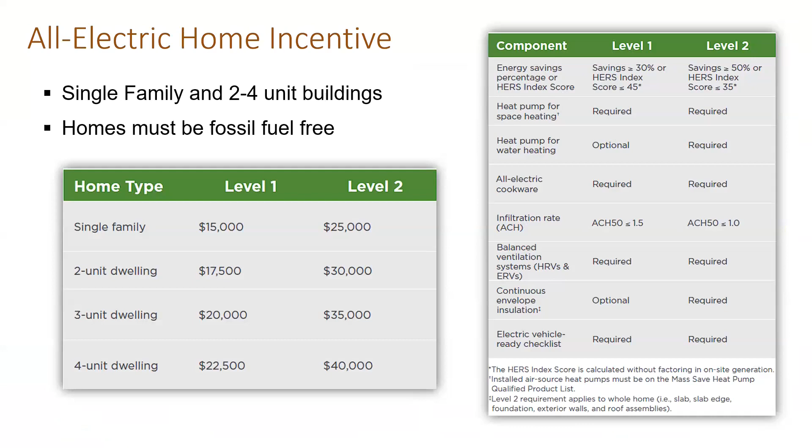So I want to thank Mass Save for rolling out these incentives and keeping them in place. Contact us or email about training opportunities through the Passive House program. We have a couple upcoming ones. At the end of this month, on the 26th, we're doing a case study on all-electric homes. Steve Demetric, who used to be a board member of Passive House Massachusetts and now does a lot of work in Rhode Island, will be presenting on cost-effective passive house projects at the residential, single family scale. Definitely tune in for that one. You can find all the registration details on our website, phmass.org, if you're wondering where to go for these events. Just go there, you can sign up, but this is going to be on Zoom.

I'd like to mention this every time, give us an update. One of the reasons I think we have a lot of new faces here is that Passive House is now part of the building code in the state. It's an alternative pathway into the stretch code, and it's a requirement for large multifamily buildings in the opt-in code.

Those are all the things I have to say tonight, so I'm going to go ahead and pass things off. David, coming up here. Thank you.

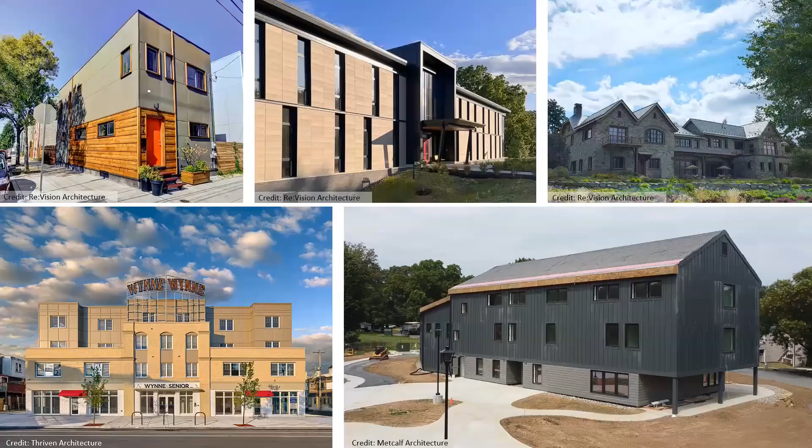So these are some of the projects we've done, both designed and consulted on. These three up top were designed by Re:Vision. The first one is a single family row house that was certified under PHI. The middle one is a building for Muhlenberg College, which consists of classrooms, offices, and art studios, and that one is going through the PHIUS certification process.

The one on the end is a very unique one for us—it was designed to look like it was 200 years old, and really designed to last at least 200 years, yet it still uses state-of-the-art prefabrication and panelization processes. All the doors and windows were installed in the factory and craned in on site. It has a real stone facade, so it's pretty unique.

It's also Passive House certified. The one on the lower left-hand corner was actually one of my first Passive House projects—a senior housing project. This one is under construction. These two were ones we consulted on, and this last one, still under construction, is a dormitory for the Solebury School in Solebury, Pennsylvania.

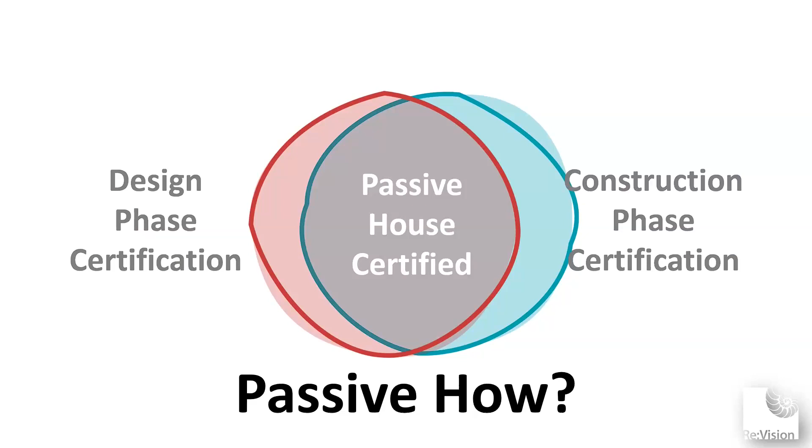So there are two phases of design to get to a certified project. There's a design phase certification and a construction phase certification, and those two combined are what gets you to a final certified project.

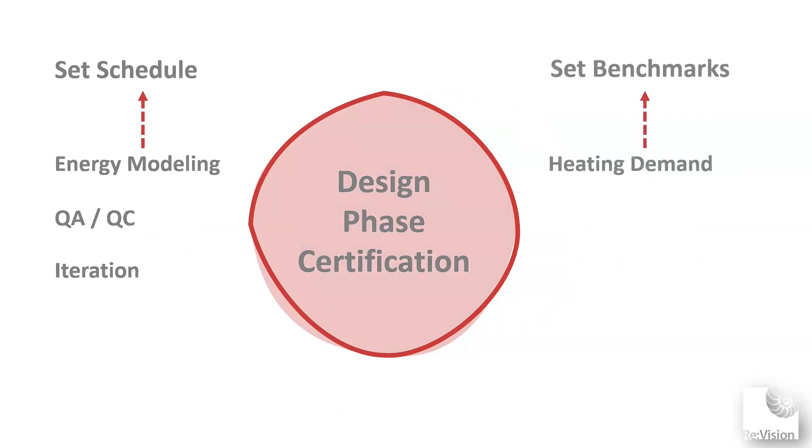As an overview of what we're going to talk about: during the design phase certification, we're going to talk about setting the schedule and the things that change when you're doing a passive house project versus a typical project. We're going to talk about how those passive house benchmarks affect the schedule, and then construction phase certification and the verification process.

Try to demystify that. I find that that's something that tends to surprise a lot of people, and that is a PHIUS-specific requirement. A lot of people are like, wait, we're doing passive house, why do we have to do Energy Star? What does that mean? So I want to take a little bit to demystify that.

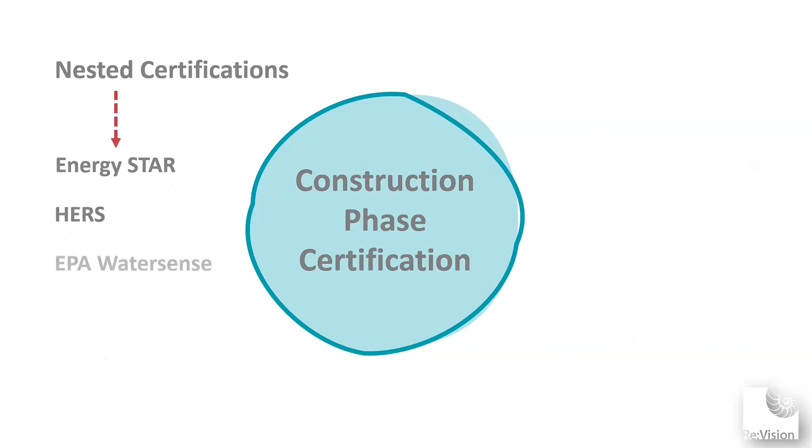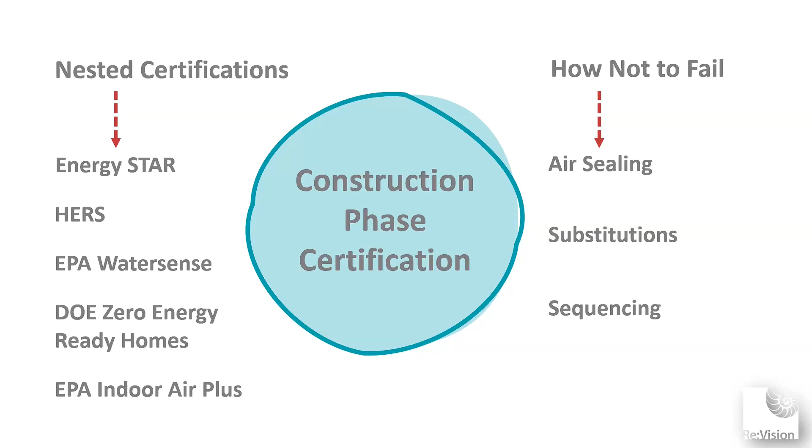We'll talk about some of the testing parameters as well, and as I said, we're going to talk about some of these nested certifications. And then I want to talk a little about how not to fail. You've done all this great design work, you've done all this coordination—I want to share a few lessons learned, some really common pitfalls and how to avoid them.

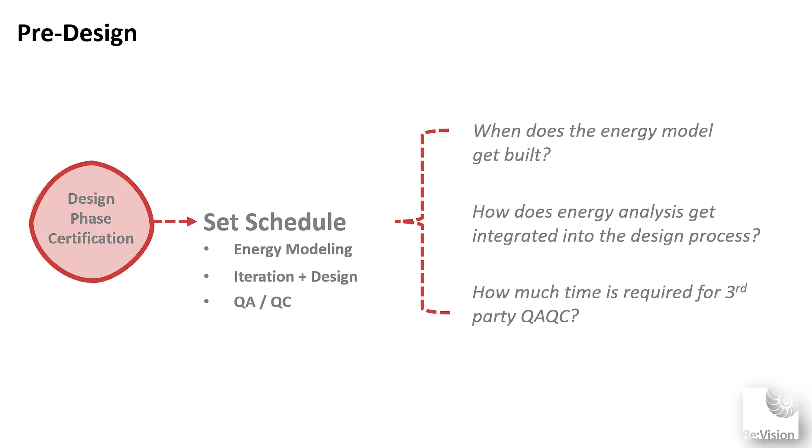So let's talk about pre-design. Really one of the most crucial things when you're scoping out a project is setting the schedule, and understanding how some of the extra things you have to do get folded into a typical design process. You have to ask: when does the energy model get built? How does the energy analysis get integrated into the design process? And how much time is required for third-party QA/QC?

What I want to show you right now is, I'm currently working on a 104-unit multifamily passive house in New York, and we just wrapped up schematic design. This is actually part of that schedule, so just to use this as an illustration.

So we had a couple of weeks where we had to do some redesign. We had to revise some units, coordinate the fenestration, have some time for internal reviews, then have the client approve those changes, and then distribute the backgrounds to our consultants. All this is very typical so far.

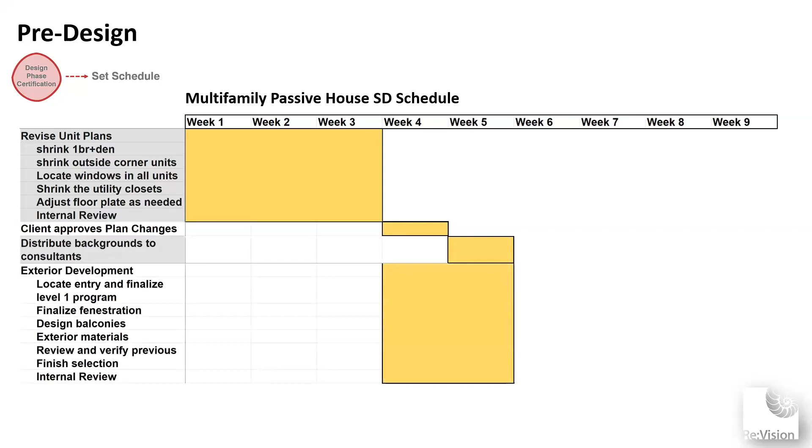And then we were going to get into the exterior development. We had some ground floor program that was commercial that we had to deal with, had to look at materials, etc. So there's that exterior development component still, and then we have about a week to get that facade scheme approved, and then move right into the building section, wall section, pricing notes, etc.

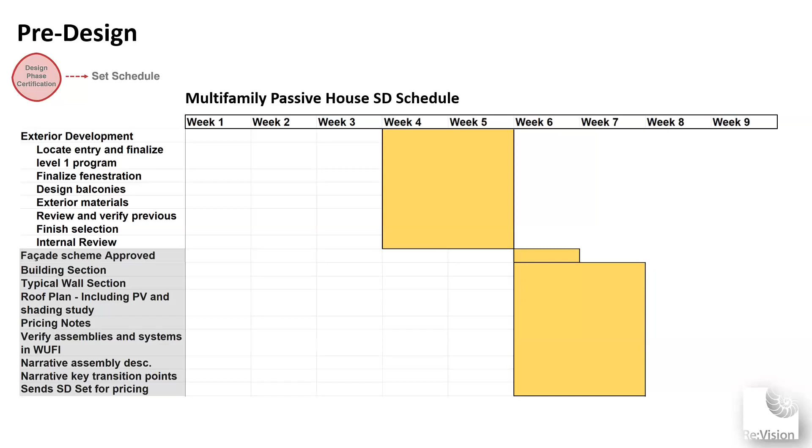And you'll notice down in that list, it also says verify assemblies and systems in WUFI. But as of yet, the schedule doesn't have any room for WUFI. Come on, there you go. And so here, we've got to pop in—oops, pressed it twice.

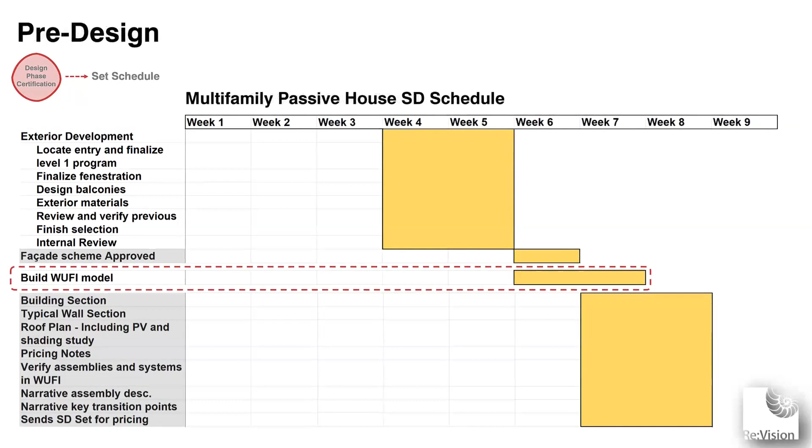So here we have the WUFI model, but you can see that the WUFI model is scheduled to happen concurrent with the building section and wall section. And the issue with that is that the design needs to inform the energy model, and then the energy model needs to inform the design. So when you're scoping out these projects, you need to make sure you're really building in time for these kind of feedback loops that you don't have in a typical project where you might just be designing to meet code at a minimum.

There are certain things that can happen concurrently. You can be cartooning out the set as you start to work on the WUFI model. You can be doing other things like the roof plan, etc., that aren't really going to be affected by the WUFI model. But you really need to make sure you have some space in order to get that feedback and integrate it into the drawings.

So we really recommend using WUFI or PHPP—it's the same thing. If I say WUFI and you use PHI, just think PHPP. They're both basically the same in this case, but we want to use both of those energy modelers as design tools, not just verification tools.

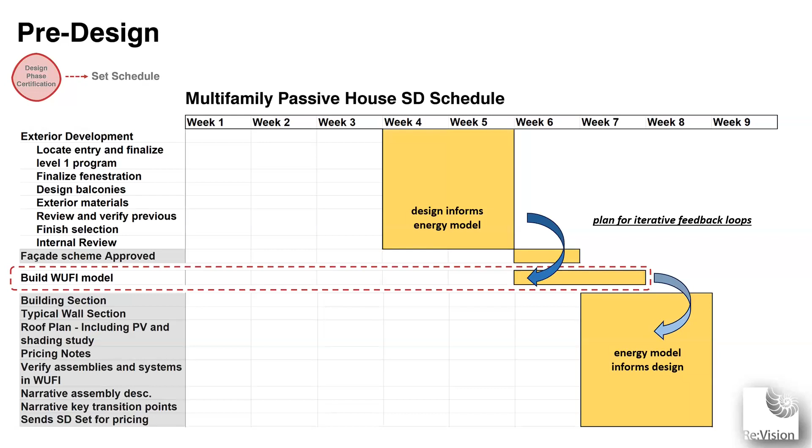And so the other really critical scheduling component is just how do you integrate the third-party QA/QC into the projects.

Their first round of review takes them 6 to 8 weeks. It's a really long time. You can do an expedited process with them. Like I said, I've worked with Passive House Academy—I can't remember what their timing was. I don't know what RDL's timing is.

And there's a bunch of, there's the certifier, so everybody's got their own timing. It's just really important to know that upfront and make sure it's going to fit into the overall project schedule, because something like this can really throw a wrench in it.

Especially when working on affordable housing projects, I've run into this a lot where we're waiting on confirmation and the developer can't actually close out the project and get the tax credits, or get certain parts of that released until they get the project pre-certified. It becomes this very intense and stressful time of push and pull as you're trying to get whatever certifying agency you're working with to give you final pre-certification or tell you what you're missing, so the rest of the team can do what they need to do and start construction.

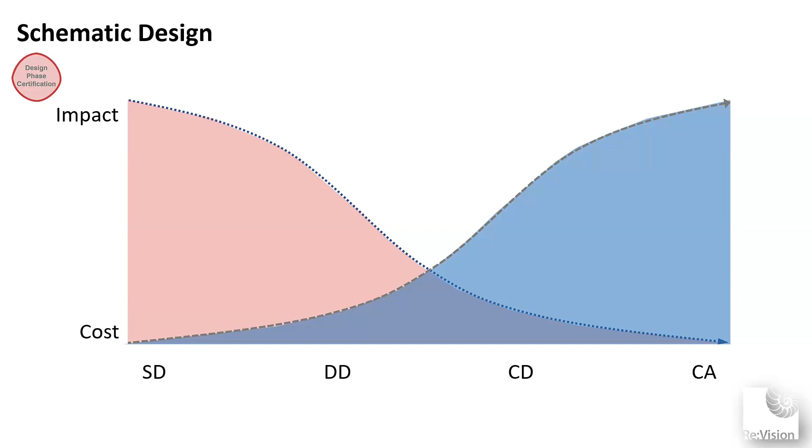And so that's why we really recommend changing the design process a little bit. In a typical design process, we start with broad decisions and we work and work until we get to more detailed decisions. One thing we find is that systems design tends to be one of the design decisions that kind of gets put off—not till the end of the project, but further down the line than it should be.

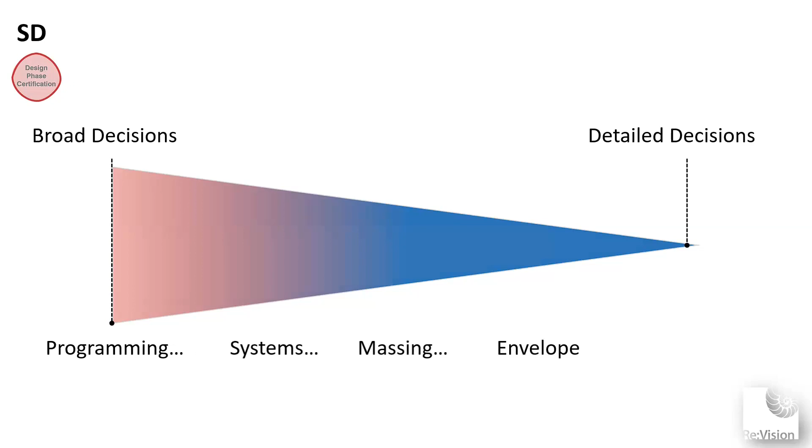So what we recommend is really moving systems much further up to the beginning of the project. Right off the bat, we want to be talking with the developers and the design teams about their preferences for how systems are designed. I'm going to give you a really quick illustration about why that's important.

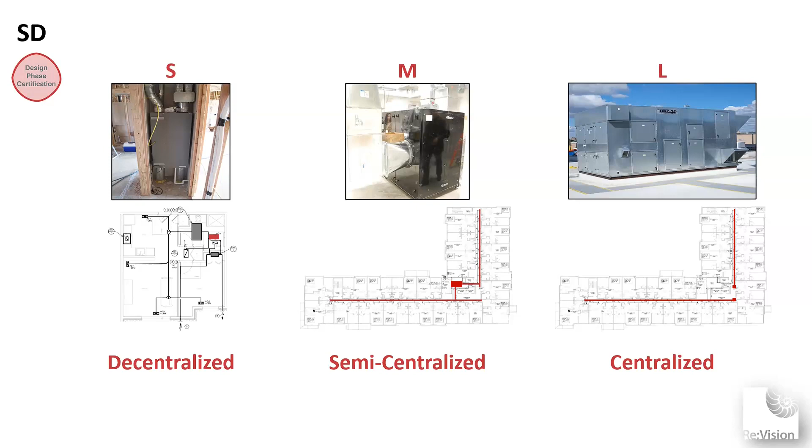Let's just talk about ventilation. As you all know, ventilation is crucial in a passive house project. You might do centralized, decentralized, or semi-centralized—I've done all three of these. I don't think there's any one right answer; it really depends on the developer's preferences mostly. That could be based on what kind of maintenance they want to do, or based on who's paying the utility bills and how things are metered. There's a lot of different reasons to choose any one of these.

But I want to focus on a decentralized system because that one definitely has the biggest effect. Decentralized systems have the advantage of being very simple, right—no trunk lines or fire dampers. There's definitely flexibility about where you can place them in the units. You might want to place them by the halls and access them from the hallway, or you might want an excuse to go into a tenant's apartment on a fairly regular basis to change the filters and make sure everything in the apartment's okay. Again, that's a developer preference.

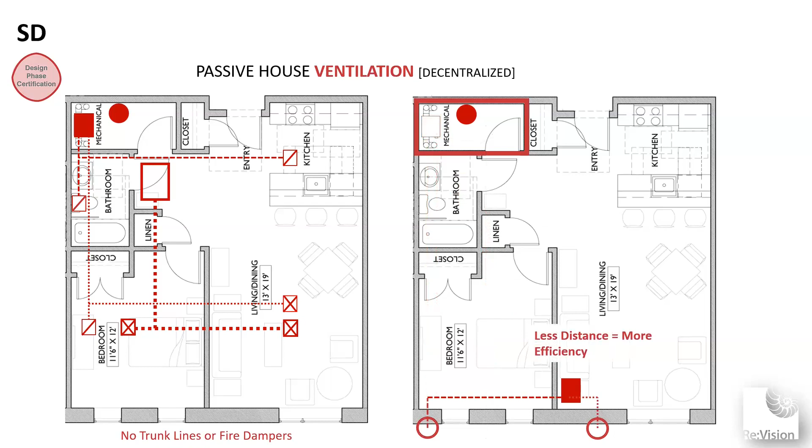And so what you start to see is that just based on the location of the ERV, you start to drive a lot of other things like fenestration. So the exhaust on a decentralized ERV like this needs to be 3 feet away from an operable window or door, and it's got to be 10 feet away from the supply. And so all of a sudden, what you typically don't see, which is the ventilation system, starts to affect what you do see, which is the fenestration.

And that fenestration, as we all know, really drives a lot of the character of buildings in general. It's a major feature. And so I can't tell you the times I've worked with a design team, and they've spent all this time making this beautiful fenestration pattern, only to tell them, yeah, that doesn't work.

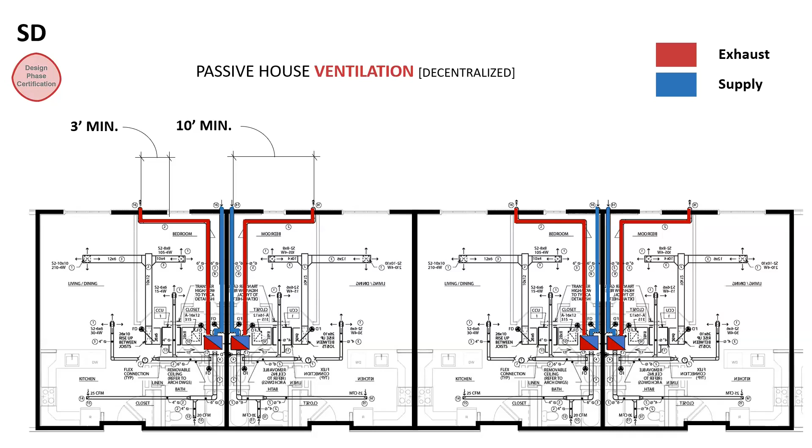So what we do is we recommend when we start working with design teams that they have this conversation up front. The sooner you have it, the less redesign teams are going to find themselves having to do. Less heartache, less pain, less suffering, much less expensive to make changes earlier on as well. You can really start to see how that's going to drive the character of the whole building, just from something as simple and unseen as a ventilation system.

So once we get into design development, that's where we really start to test the assemblies. As I said, we want to use these energy modeling tools, whether it's PHPP or WUFI, as a design tool and not just a verification tool. And one of the ways that we do that is that we'll test different versions.

We'll see what is the optimal amount of insulation for any particular assembly. And we can see here that there's very little difference in energy savings between 4 and 6 inches of insulation. However, 6 inches of insulation is going to be much more expensive to install than 4 inches. And perhaps we can find a way to make 3 inches work on a particular project as well.

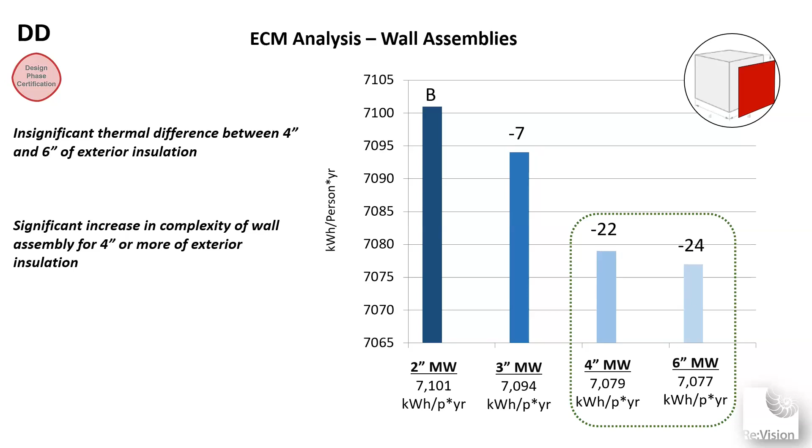By the way, the B on these were taken from an actual project. The B is for the baseline, so that's where we started, an initial assumption of 2 inches. Then we tested 3 inches, 4 inches, 6 inches.

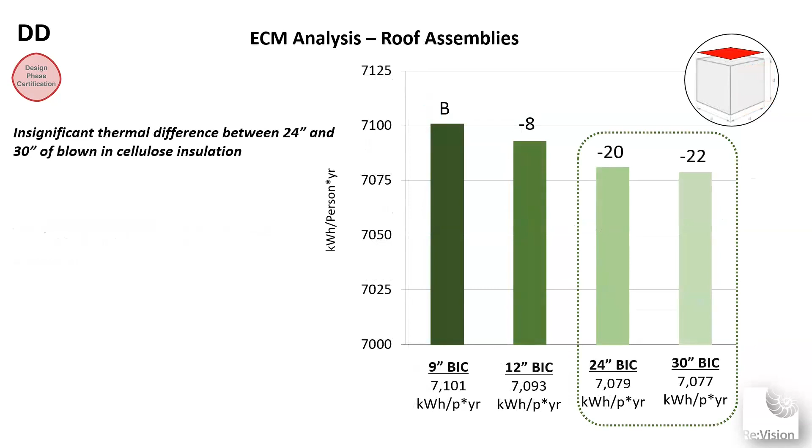We do the same thing with the roof. You can see here that there's very little difference between 24 and 30 inches. However, depending on what kind of roof it is, maybe what we do is we back off on the wall insulation. We go, okay, 4 inches of exterior insulation on the wall would be ideal. However, it's going to be really expensive.

We're going to need larger girts, a different kind of support system for the cladding. So let's try to get that back to 3 inches, and maybe we can add more insulation in the roof if it's just blown-in loose fill. And even though 30 inches doesn't save a lot more relative to 24, it might be enough to offset a loss elsewhere. So we use these as parametric design tools in order to optimize the assemblies and then optimize everything as a whole.

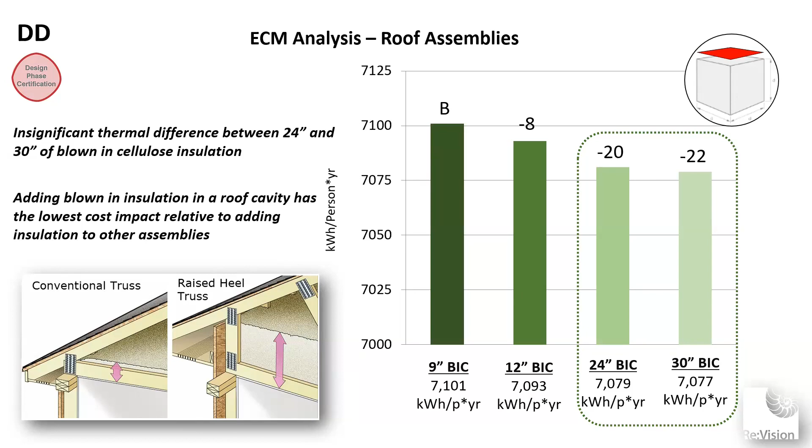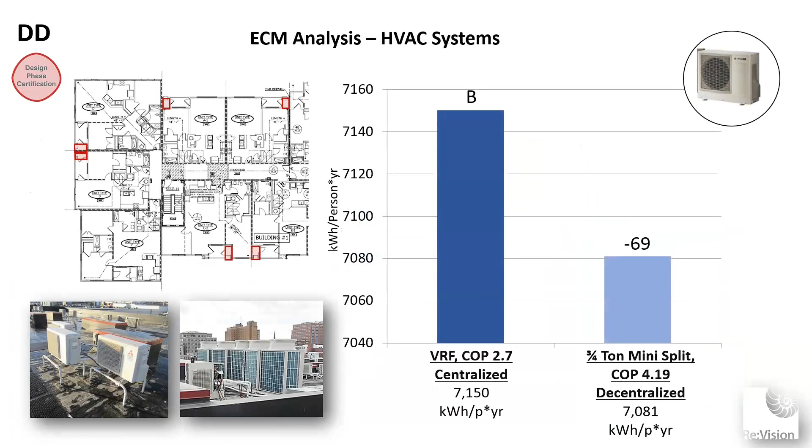We do the same thing with systems too. In this case, we were looking at centralized VRF versus decentralized mini splits. And again, there's going to be reasons other than energy that you might choose a centralized VRF over a decentralized mini split. I want to emphasize that there's no one right answer. What we're trying to get is to a balanced and optimized set of choices for the envelope and for the systems that work for the specific project.

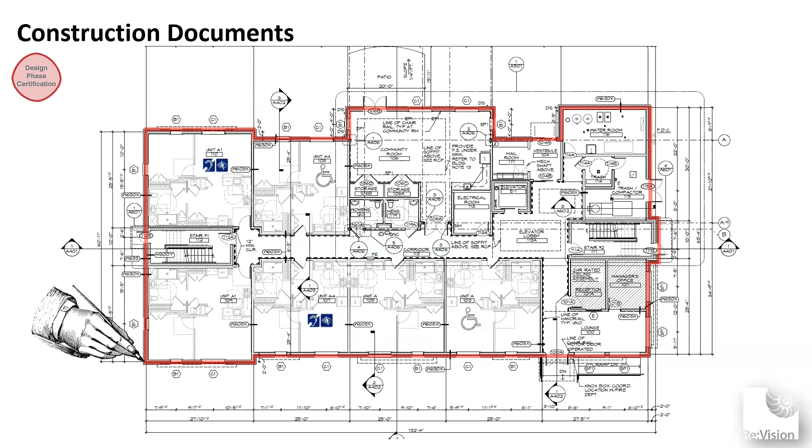When we get into construction documents, this is just an example of the red line test. It sounds pretty simple. We often will do this actually in the field with builders. We'll get into CA in a little bit. But although it's a simple test, it's a powerful test, and shows you where you start to have problem areas.

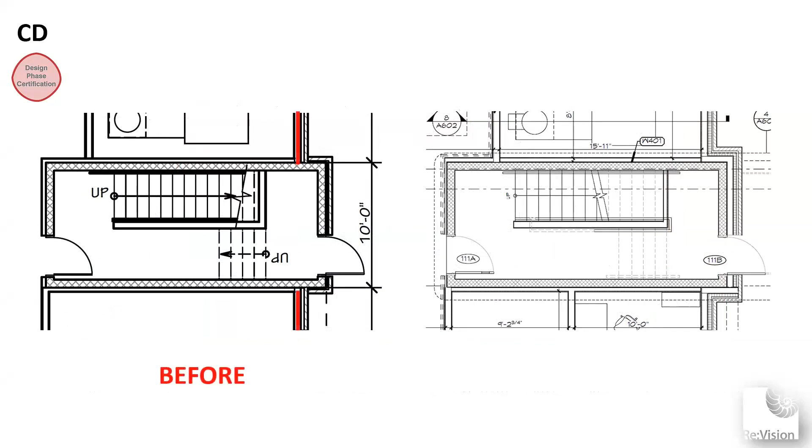So this is an example of some clients we're consulting for. They showed us these drawings. The CMU stair core was breaking through the thermal barrier. And so what we did is we just showed them how to wrap that thermal barrier around that CMU. In this case, it was a pretty easy problem to solve.

Others are more tricky. And one of the things that we find as consultants is that we can have conversations about sequencing. I know that sequencing is definitely a gray area for architects when they're talking to builders, because it gets into that kind of means and methods territory. But as consultants, we can talk about it.

And I was just talking to—tell me your name again? Zach. So Zach and I were talking earlier, and he was telling me about one of the things that they do on site is that they have these toolbox talks.

Every week they're game planning out the next two weeks of work, all the subs. And in a sense, we do a similar thing.

When we're going through the design process with teams, in order to think about things like constructability and sequencing, we do early design stage clash detection.

And make sure that those things are communicated in the drawings to the build team in the field. So in this case, we're looking at what does continuous thermal barrier actually mean.

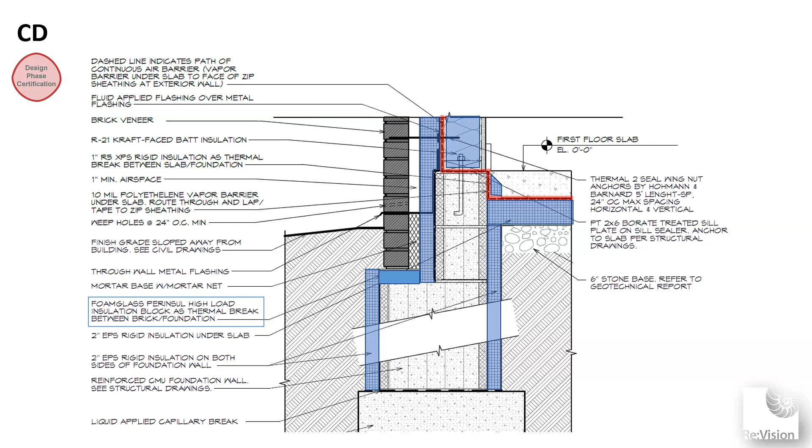So again, sequencing, responsibility of trades - that's the other key thing when we're talking through a lot of these details. It's actually more unusual for one trade to be responsible for the entirety of the air barrier. You often get one trade doing one part of the air barrier, another trade doing another part. So doing something like those toolbox talks and really making sure each trade understands their specific role is key. I'll show you in a little bit what happens when that best practice doesn't happen.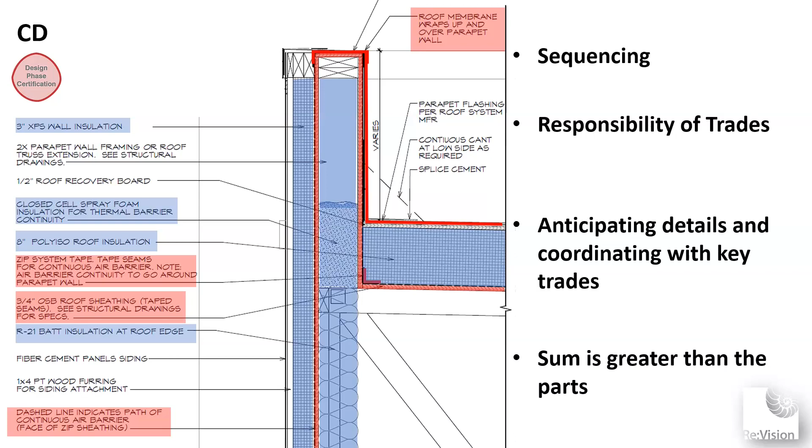Another thing we like to communicate to design teams is just leaving space for things we don't typically think about. I've seen this get projects into trouble too - this is just a waste line or vent stack.

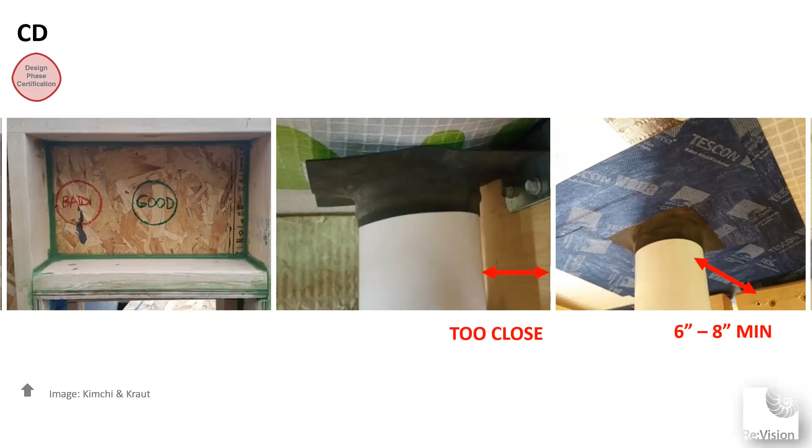If you don't leave it, we're used to just shoving them in a corner, not thinking about them - oh, the plumbing engineer will just stick it wherever. But you really need to leave enough room around it for the gasket and for the tape, because that is penetrating the air barrier, and that's going to be a major weak point if you don't prepare and plan for it.

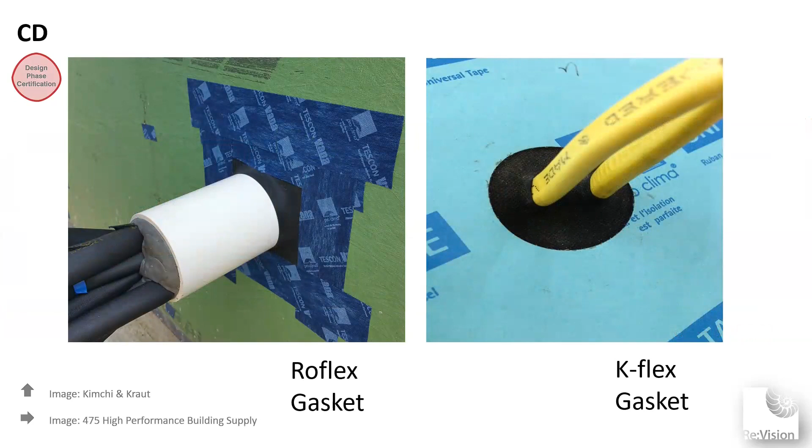This is just an image of a Roflex and a K-Flex gasket. The Roflex is for larger penetrations, ducts or larger pipes, and the K-Flex is for electrical, smaller electrical wires and whatnot.

So there's things like that where we want to go hardcore when it comes to passive house - like the air barrier, we typically go pretty hardcore, make sure all the gaskets are there, make sure there's room for everything. And then there's other places where we know how to back off.

Entry doors are always a troublesome part. You can get passive house quality entry doors that meet ADA and egress requirements, but they're really expensive and hard to get. So often what we do is we just go for a pretty good solution - we've used Kawneer 451s, we've used 1600 UTs, we've used a couple other brands as well.

Like a Kawneer storefront system, the entry system just kind of blends in with the rest of it. So you have to do a really good job weather stripping it. And you take a little bit of a hit on the thermal performance, but the buildings tend to have enough room with the metrics that we can handle something like that.

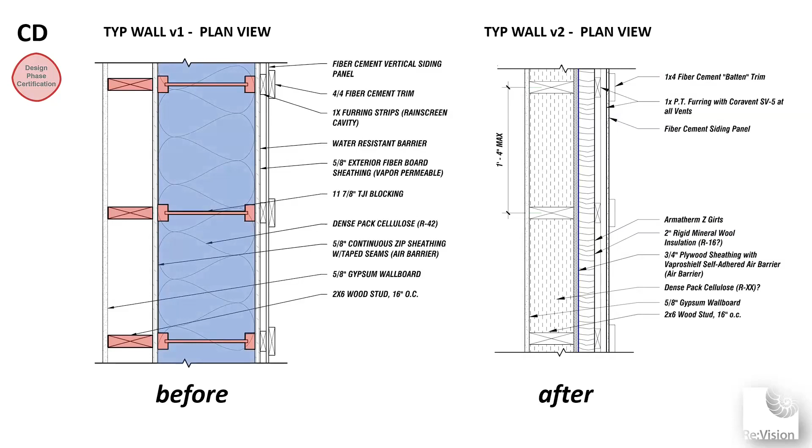However, once they brought us on, we built the energy model and said, hey, we can actually get this down to something much more standard - just a typical 2x6 wall, dense packed cellulose, 2 inches of exterior mineral wool insulation. It's really about knowing when to push and be hardcore about what it takes to achieve passive house, and knowing how to pull back and optimize to make something affordable and effective.

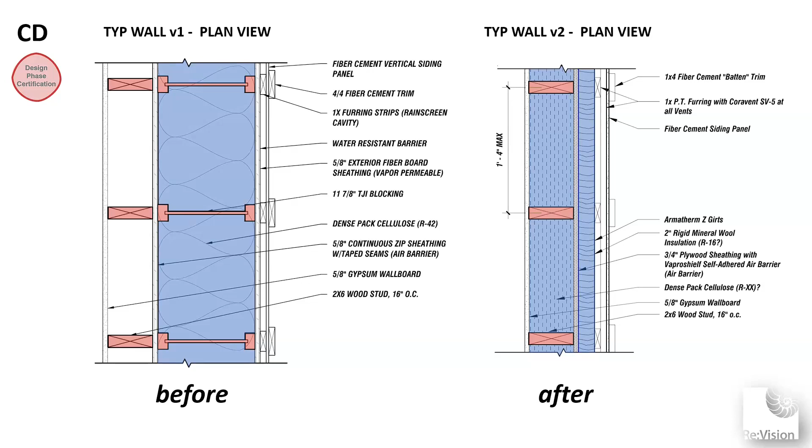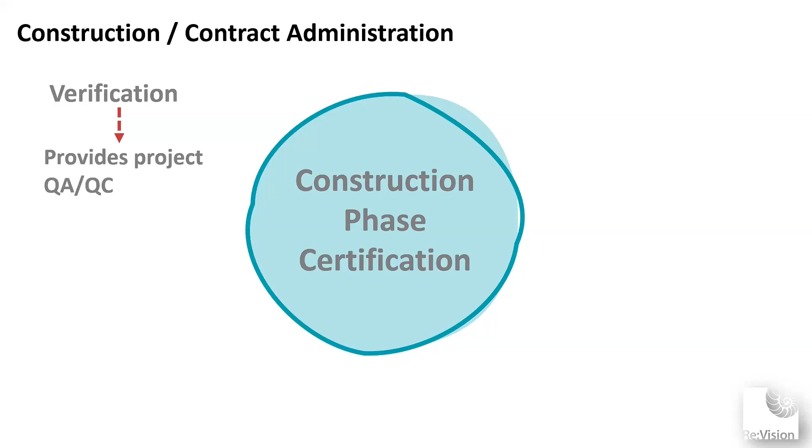So once you get into construction, we've got the verification process. Why do we do verification? Well, it provides project QA/QC, it validates the design decisions, it verifies the performance goals are met, and that it's going to function as intended. There's a certain aspect of commissioning to it, and it confirms that the building construction matches the drawing specs and energy models.

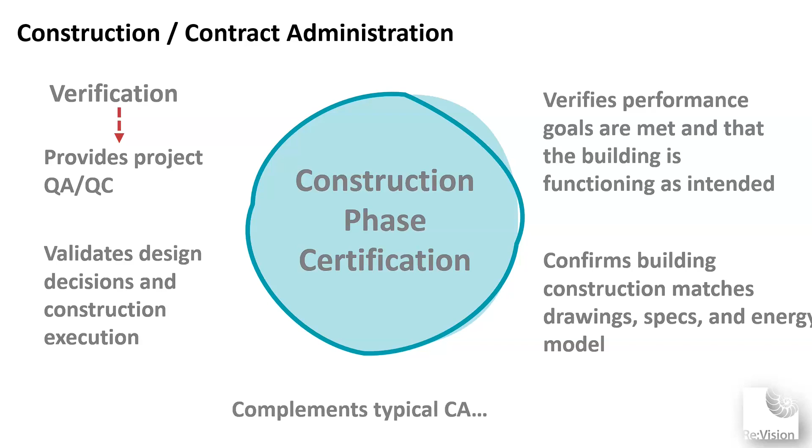I know that the developers here go through all this trouble and expense to get a project designed. You want to make sure you're getting what you paid for, and the verification process really helps with that. There's sometimes some overlap with typical CA, but it really is more in depth. I'd say it mostly complements typical CA.

In that verification process there's the assembly documentation, checklist completion - we'll talk a little about the nested certifications, and that's where the checklist comes in. There's some contractor certifications that always tends to take people by surprise a little bit. It's not a big lift, but if you're not anticipating it, it can be an issue. And then there's the testing regimens - envelope air tightness, duct tightness, and ventilation balancing.

So the verification timeline actually starts during design. This is specific to PHIUS - if you're working with a PHIUS rater or verifier, you want to bring them in early if you can, and have them review the design as an extra kind of QA/QC. They might have some insight regarding the testing and verification they're going to have to do later on, and can help the design team streamline that process.

And then there's the slab and foundation installation, where they're going to photo document that there's the right amount of insulation before you pour the slab. If you pour the slab and don't have any photo documentation of the insulation underneath, that's a problem - you gotta dig it up. You might find Jimmy Hoffa. You'll at least hopefully find enough insulation.

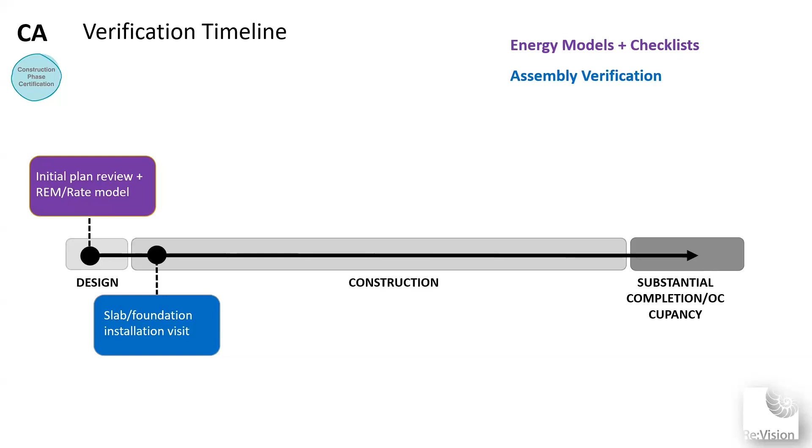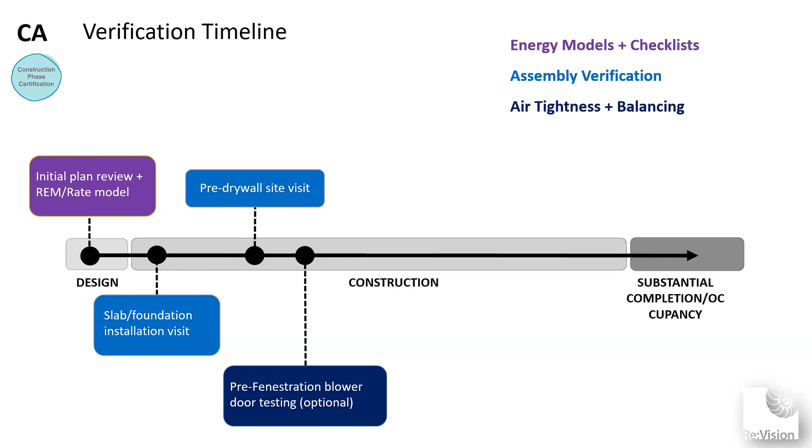So there's the pre-drywall site visit, which verifies the insulation has been installed correctly. There's pre-fenestration blower door testing. This is an ideal scenario - it doesn't always happen this way, but ideally, if you're building, and it depends on the type of building, you can have all the doors and windows framed but sheathed over them. Then you do your first blower door test without the doors and windows installed, or with maybe one or two installed. That really helps minimize the places where leaks can occur, so it makes leak chasing much easier. Then you do a follow-up test once all the windows and doors are installed, which again helps minimize the leak chasing. In some ways that represents an ideal process; in other ways it certainly adds cost and complexity.

Regardless, we recommend not waiting until the final blower door test to do your first one at any rate. So you have duct leakage testing, balancing of the conditioning systems and ventilation systems. And if you're doing PHIUS, you're also doing Energy Star, and Energy Star requires compartmentalization for multifamily homes - that's where you're testing air tightness between the units, as opposed to the whole building. Then you finally have the whole building blower door testing, and some final wrap up with the workbooks and checklists. Again, just to emphasize, the pre-fenestration blower door test is optional, but we don't recommend waiting.

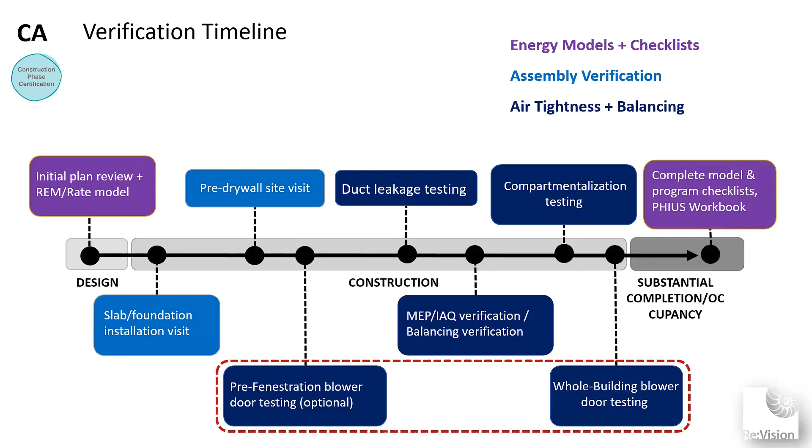So what do these nested certifications look like? For a single family to 5-story multifamily building, in addition to Passive House, you're also going to get certified with Energy Star, EPA Indoor Air Plus, and DOE Zero Energy Ready Homes. If you're doing 5-story multifamily with centralized systems, the only one you're doing in addition to PHIUS is EPA Indoor Air Plus, and same thing with 6-story multifamily and commercial.

When you say centralized system, are you talking about ventilation or mechanical system? Both - I'm not sure what the threshold is for heating and cooling system, as well. It would be a whole centralized system - both heating, cooling, and ventilation. But not necessarily hot water, which is treated differently. So this is really just about the delivery of either fresh air or conditioned air. But we'll get into hot water too.

For hot water, there is actually another certification, which is WaterSense, which is going to come up in a minute, and that's only for residential projects.

So here you can just see the list of the tasks required for each one. And really, when you do a Passive House project, regardless of whether you're doing PHI or PHIUS, you are hitting all of these other systems' benchmarks automatically - you're going so far beyond Energy Star. Like when I first started consulting on Passive House projects, we actually had some conflicts.

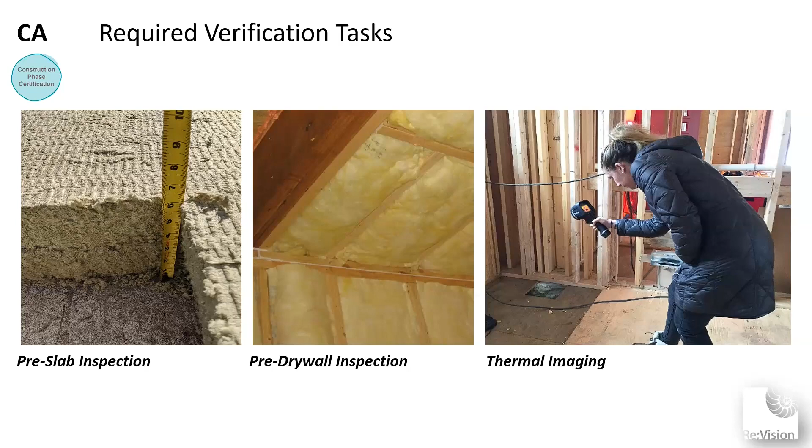And so when you're doing Energy Star, right, that requires a HERS rating. And that requires another energy model, a REM rate energy model. So in addition, in this case to WUFI, you probably aren't doing it if you're using PHPP.

HERS is kind of great in a lot of ways. I mean, it's kind of a benefit. We were talking - tell me your name again, I'm sorry. Kent. So Kent was telling me that his projects also have LEED for homes ratings, which is great.

And I think we're seeing some of these rating systems get reflected back in the real estate market. I'm super interested in that because it's definitely one of the weak points, right? It's like we do all this great work, and then real estate professionals don't know how to value all of this incredibly valuable work that we do. But we do see HERS sometimes get reflected in real estate, and LEED for homes is similar.

So basically it's based on a typical score of 0 to 100, right? 100 is based on the 2003-2006 IECC. Passive houses tend to be somewhere around a score of 30. And that assumes no PV.

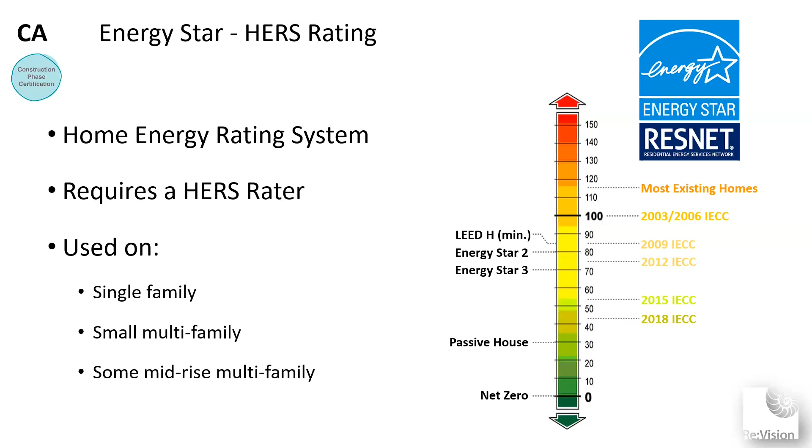So for Energy Star, right, you are going to do a blower door test, as I mentioned before. That requires a compartmentalization test. And so that's when you're in a multifamily building, right? You're testing unit to unit as opposed to whole building.

It requires an energy model, a different energy model. It requires a HERS certified professional, right? So that's one of the differences. Sometimes you hear RESNET rater versus RESNET verifier. The RESNET rater is also qualified to do the Energy Star rating and model building.

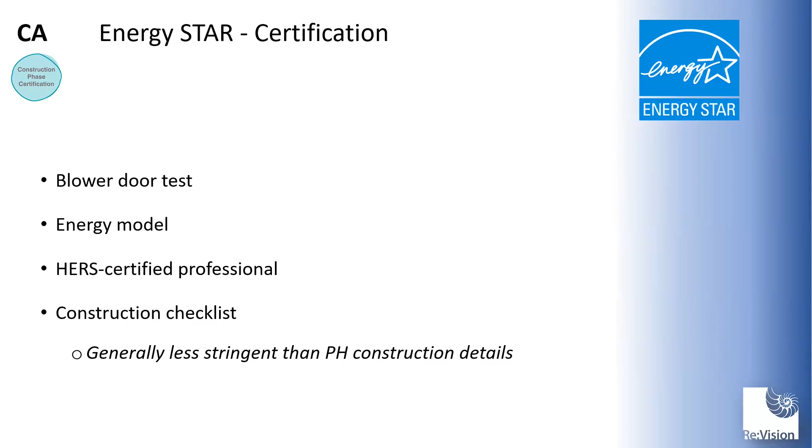And so the credentials that I mentioned, right? So the HVAC contractor for Energy Star - this is always a little sneaky one. They do need to get credentialed by the ACCA or Advanced Energy. I think there is a charge for that one. Yeah, it's about $1,500. And then the general contractor has to register as an energy partner. There's a free training and there's no other charge on that.

For EPA Indoor Air Plus, that actually is sort of like Energy Star is nested within that. So that requires Energy Star. It's going to deal with moisture control. As I mentioned, there's radon issues that it looks at, pest screens, there's some HVAC requirements, and there's low emitting materials, which is great.

I actually think this is great. One of my complaints - it's kind of the best and the worst thing about Passive House. On the one hand, I love that Passive House tells you where to go, but not how to get there, right? It gives us lots of freedom as designers.

But on the other hand, when we're really thinking about sustainability and using this as a tool to fight global warming, we could either be doing more harm than good, or just not be doing as much good as we think if we're not using good materials, right? And so Indoor Air Plus kind of provides some guardrails for the materials that get chosen on a project as well, and I think that's a real benefit.

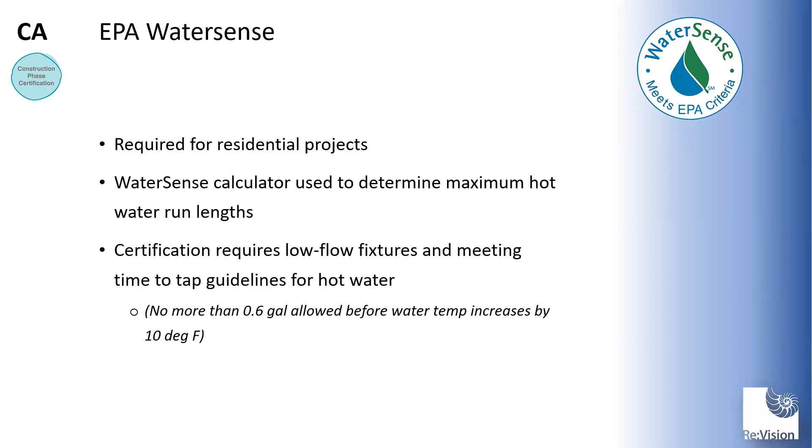And it's not that it's that hard to do, but you do really have to get your plumbing engineers on board early and make sure that they're filling out the calculator. And of course, whether it's PHPP or WUFI, you're doing a ton of plumbing takeoffs. And so this is one of those sneaky little things that is actually really easy to screw up if you don't know about it ahead of time. And so this is something that we always make sure our plumbing engineers are very, very aware of.

So systems testing, right? We have ventilation rates, ventilation and heating and cooling rates. So I think the big thing here is that the actual built systems need to be within 15% of the design rates, right? And that the exhaust and supply rates need to be within 10% of each other.

That's really, I guess, the way that you design for that, right, is by making sure that you have sufficient—let's say it's a residential unit—making sure that you have the doors undercut sufficiently. That gets into some acoustic issues. So do you do transfer ducts, right? And is that in the ceiling or is that in the walls? Really making sure that you have enough airflow, or the ability for the air to flow from room to room, in order to achieve these rates. Again, it's not rocket science—we say it's not rocket science, it's building science, right? And as long as you provision for it up front, it's actually very reasonably easy to do.

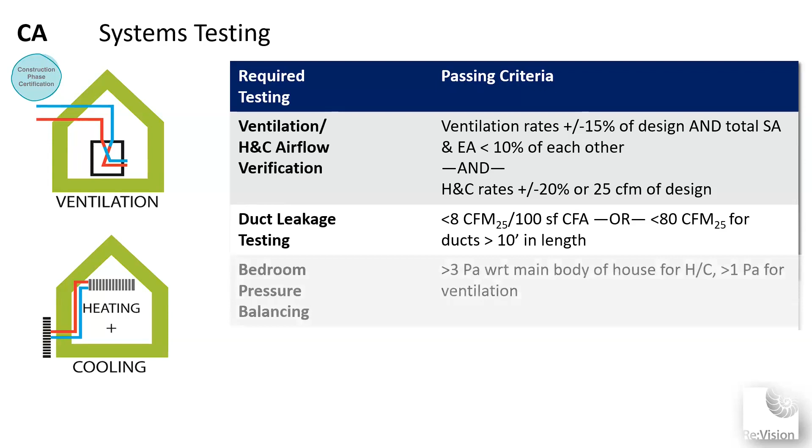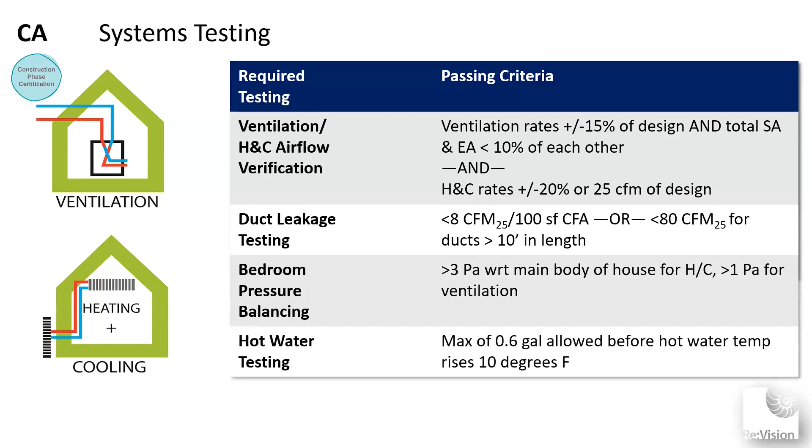Bedroom pressure balancing—this is what I was describing in regards to door undercuts or transfer ducts—and then again, hot water testing.

And finally, right, and this is just for PHIUS, I didn't put up the PHI metrics—they use a different metric. They use air changes per hour. And they have two different—I think one of the things that people tend to miss, right, and it's always kind of bothered me—there are different testing standards when you're doing PHI for larger or smaller buildings, right? Like, I feel like PHI often gets unfairly criticized for using ACH, because if you use the normal testing protocol, your building can look tighter than it actually is if it's a larger building. So there's two different testing protocols, and you just have to make sure you're using the right one depending on the size of your building.

I guess the CFM 50 per square foot of envelope, that tends to scale a little more readily, and that's why PHIUS adopted this one. But you're really getting to similar places.

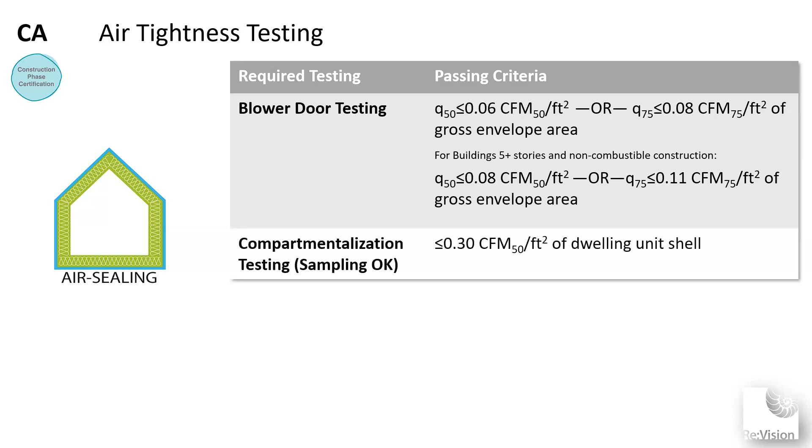The other really cool thing is we'll often loan our thermal camera to the contractors, and it becomes like a game. I think people just like new tools and toys. But it's exciting to see them get like X-ray vision, find all the leaks, and turn it into a game, finding more than they even need to find.

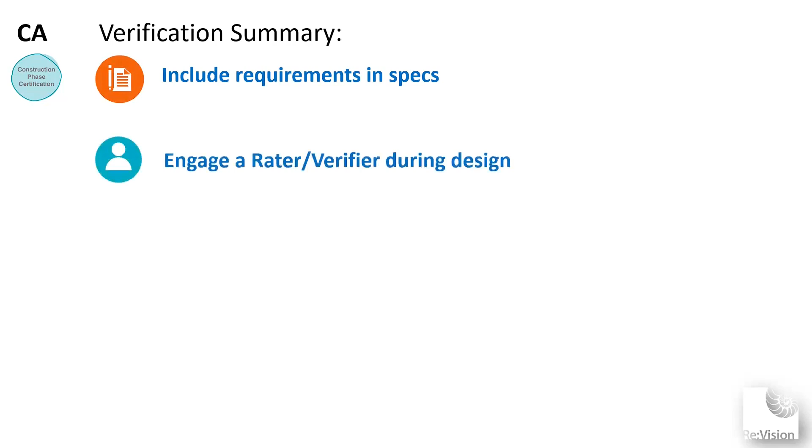So in summary, for verification best practice: include requirements in specs, engage your rater or verifier during design, and note the differences between PHI and PHIUS. It's something you want to do early on because it might help you determine which system you want to use.

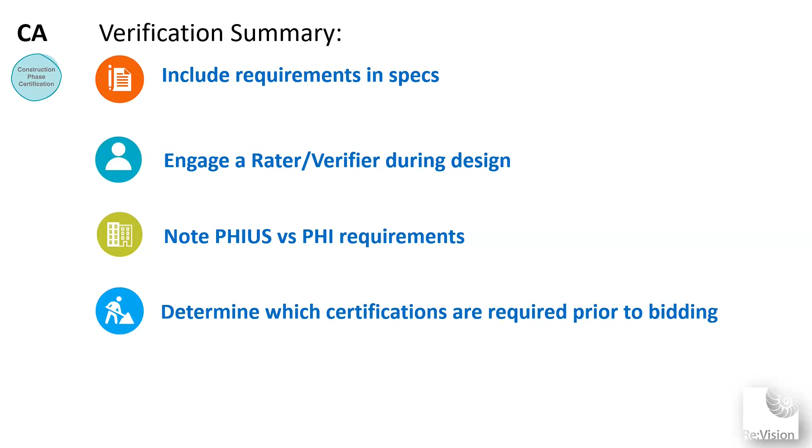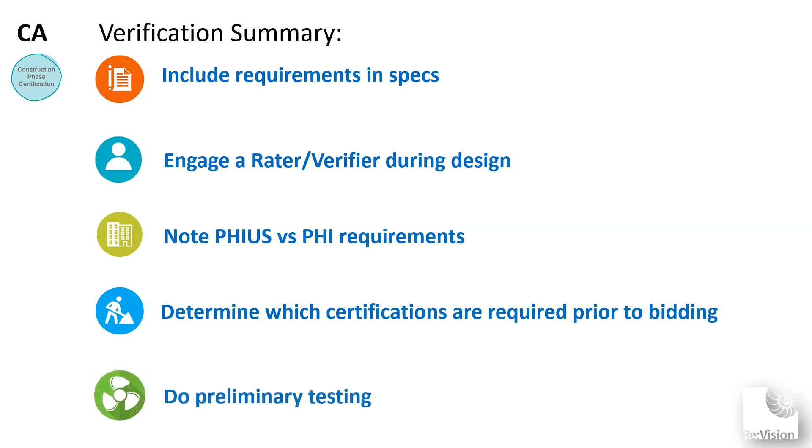This is really key: determine which certifications are required prior to bidding. You don't want your GC to hire a sub, say the ventilation contractor, who didn't realize he has to go through training and register with Energy Star. We don't want to surprise anybody with that, so make sure all that stuff is disclosed early on. And then test early, test often.

So, lessons learned. You've put in all this time, your team has worked really hard, and you have a passing pre-certified energy model. You want to keep it looking like this. You don't want construction to turn it into that. And unfortunately it's easy for that to happen.

I don't want to put any of you builders down, because my job is way, way easier than yours. But the construction process is frankly the weak link when it comes to building passive houses. Not because the builders are bad, far from it. It's because they have the most challenging job of all. They're out there in crappy weather, all sorts of conditions, and it's super complicated. I'm sitting in my office with a cup of coffee, drawing pretty details.

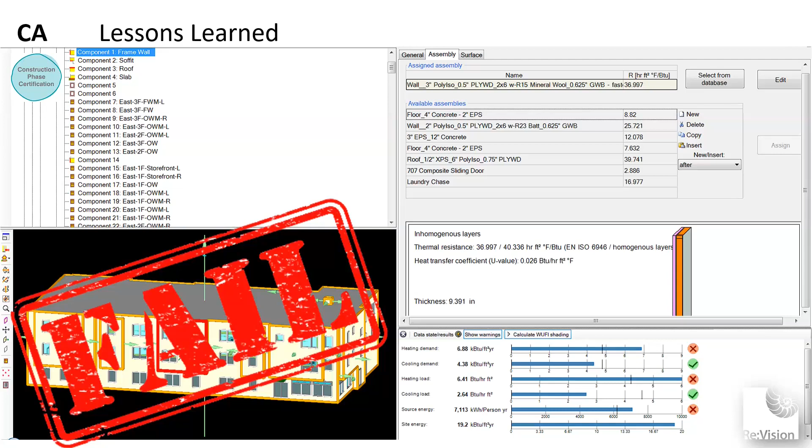This information isn't meant to trash contractors at all, but to help everybody avoid common points of failure where people get tripped up. A lot of times what happens is subs get on the project and they just don't understand how what they're doing fits into the larger whole. They come to the site and they're just doing their thing.

This was one of my first couple passive house projects. We had a bunch of extra sub-slab vapor barrier, and the intention was for that vapor barrier to extend over the stem wall and wrap up and get attached to the sheathing, to be part of that primary air barrier. The masons showed up in the morning and said, 'what the hell is all this extra vapor barrier doing here?' and they cut it off, put it in dumpsters, wasting a ton of material. Then they poured the slab and we had nothing to attach to the primary air barrier on the walls.

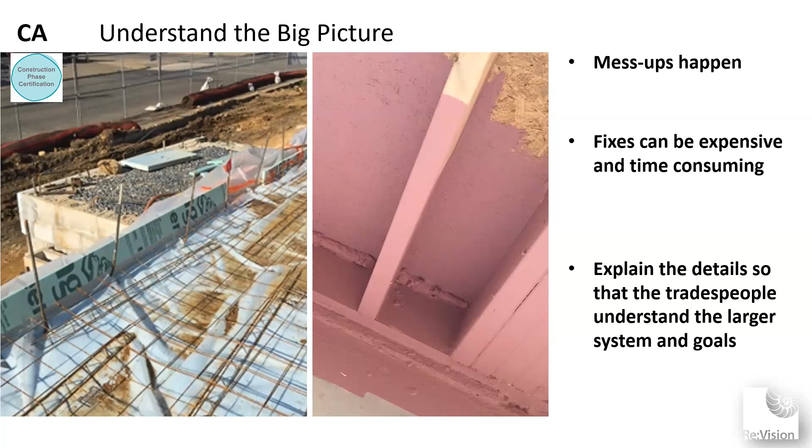So the way we fixed it: we used Prosoco fluid-applied flashing and painted it a couple inches onto the slab, up over the sill, and about 18 inches or 2 feet up the wall. It did the trick, but it was expensive, time consuming, super annoying, and a super valuable lesson in communicating the entirety of the design intent to every single sub. That's why I love that story about doing the toolbox talks, making sure everybody knows how their small part fits into the greater whole.

Another thing to do is set standards: show the contractors what a good tape job looks like. Again, this isn't meant to be insulting, it's just to make sure everybody is on the same page, speaking the same language, with a visual representation of a standard that should be met. Because I've seen this so many times.

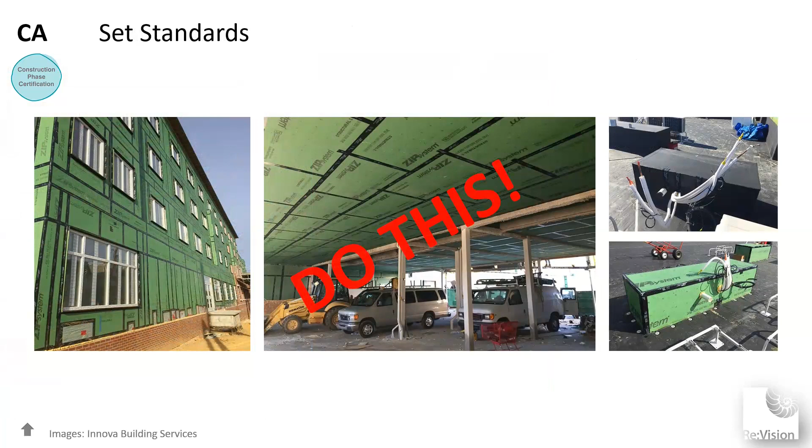Another thing: designate responsibility for the air tightness.

Something we've started to implement that I find helps a lot is doing a schedule of penetrations. Just like we do a window schedule, a door schedule, and equipment schedules, we'll have a schedule of penetrations. So every time a conduit, a duct, any kind of plumbing pipe, radon pipe, whatever it is, anytime something is going to penetrate the air barrier, we have that in the schedule, and we know how it's going to get sealed and who's going to do it.

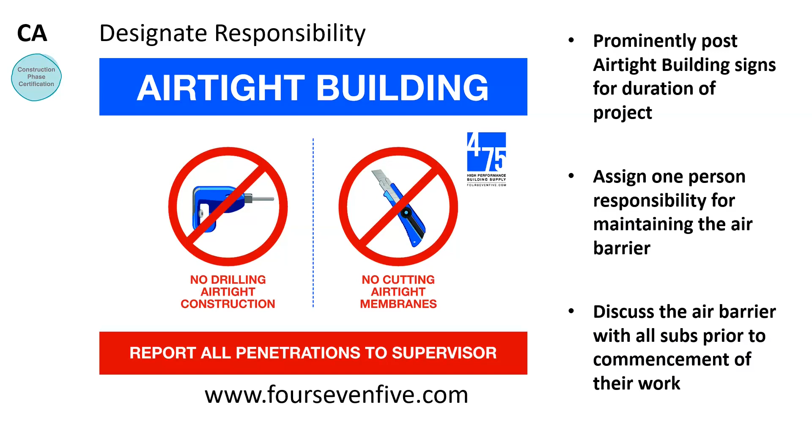Now this is really tricky. This is a true story - I'm going to change the names to protect the not-so-innocent. Substitutions will get you in trouble, and substitutions always happen. So the message here isn't don't let anything get substituted, because that's just not reasonable. The lesson is be extremely careful, and here's why.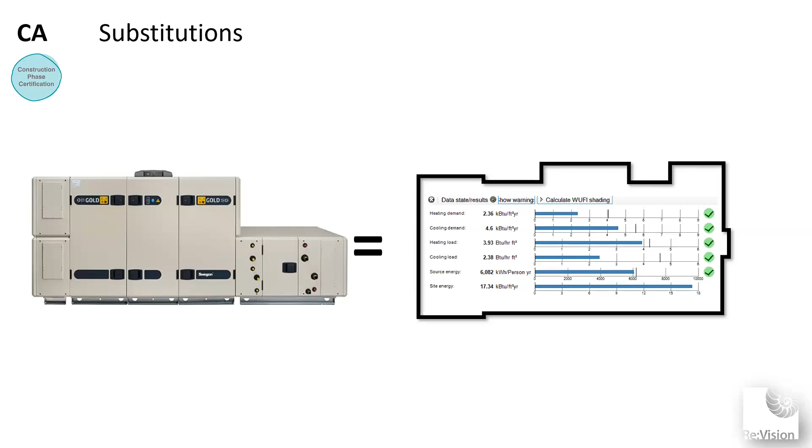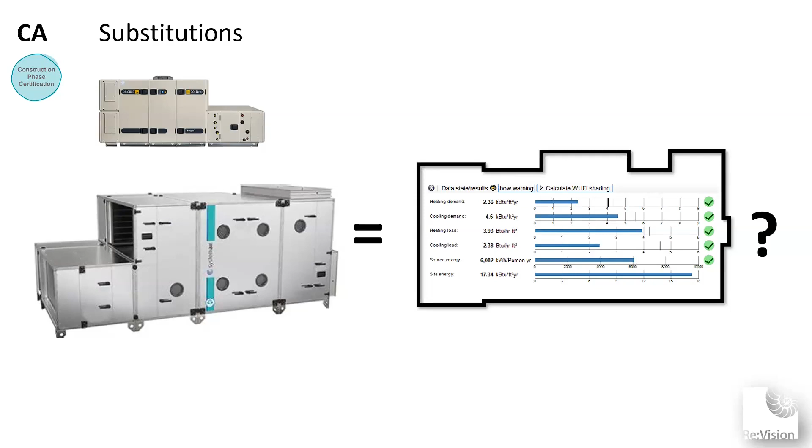We had specified this super sweet passive house certified Swegon Gold RX unit, and we were meeting all the benchmarks. It was terrific - that's how the project was bought out. Then during construction, the contractor wanted to make a substitution. The real issue was that the architects didn't consult with me before they accepted the substitution, and it took them a little while to admit that. It was a bit of a surprise when they finally said, 'oh, this isn't a substitution request - we've already accepted it.' That was a problem.

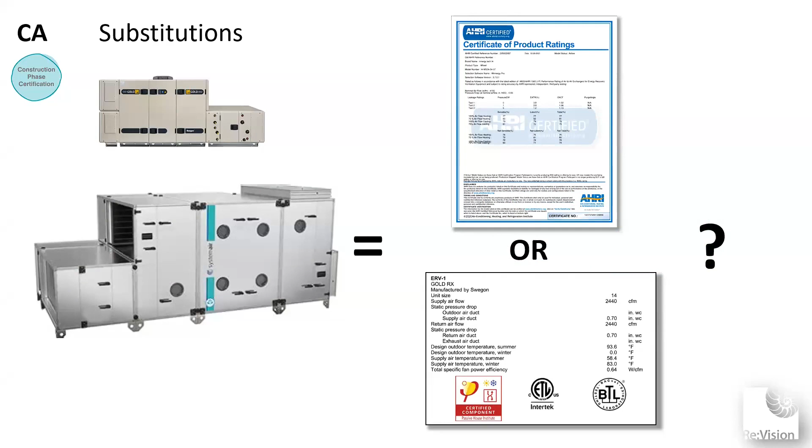Once I found out they did that - and this process doesn't change regardless of whether they did it or not - the first thing you have to do when looking at a substitution is figure out: does it have an AHRI certificate, or is it certified by Passive House? This is for a piece of ventilation equipment. Because if it's not, we have to derate that equipment by 12%, and that's instantly going to kill the model - kill the project right there. In this case, this unit was working on getting its AHRI certificate, but didn't have one yet. If you've ever had to deal with AHRI, it's a total black box - they just say 'yeah, it's coming, it's still coming.' You can't get any information about an actual timeline.

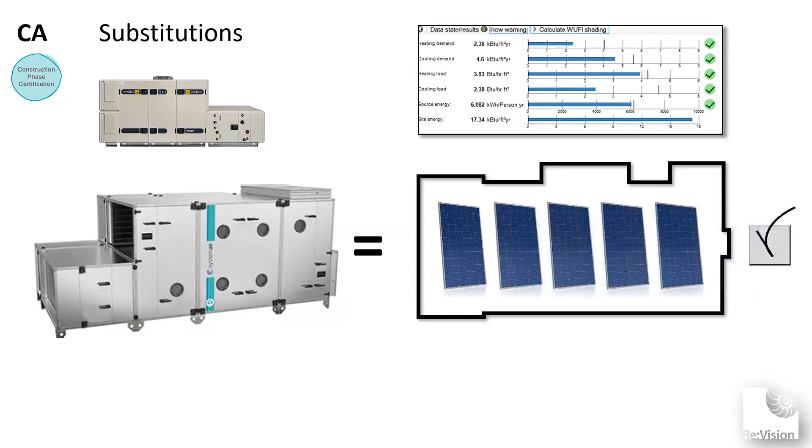Anyway, it finally did get its AHRI certificate, so we were okay. It was less efficient than the Swegon, so we needed some additional solar panels. The next question was: how many do we need, and do they actually fit on the roof? Turns out the additional solar panels fit on the roof, but how much did they cost? The new substituted unit was $20,000 less than the specified unit, but the additional PV cost $70,000 more. So that was a $50,000 add to the project.

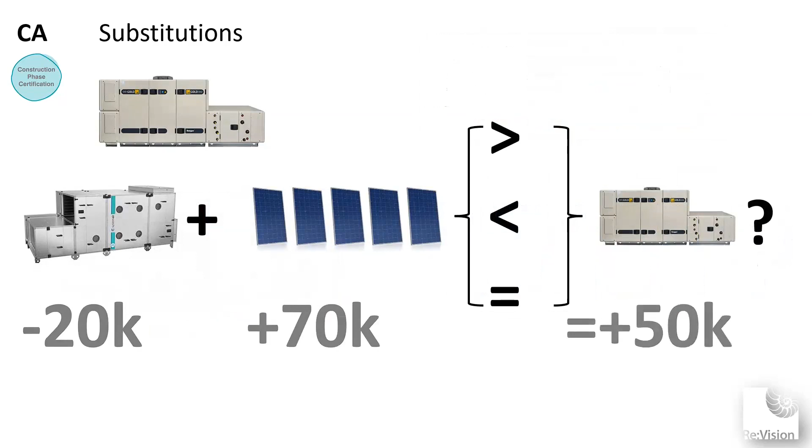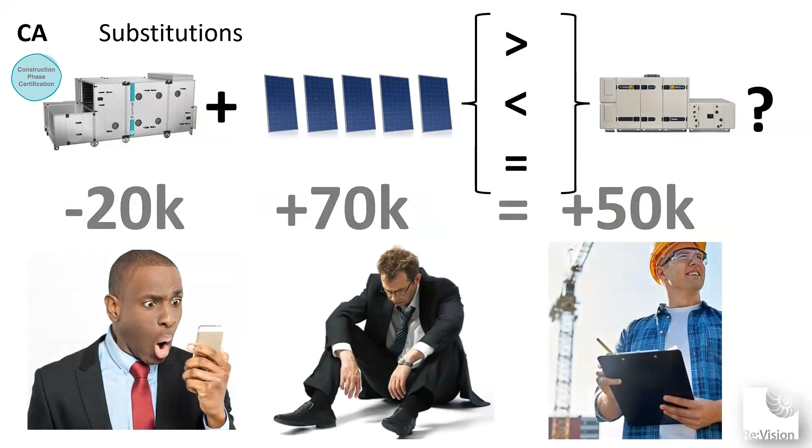So what we wound up with was a pissed off owner, a very sad architect, and a very happy builder because they just earned their bonus. One of the things we realized was that the architect frankly had some disincentive to consult - they have a fixed fee. I think at this point in the project we were probably hourly, but we could have saved them a ton of pain and suffering if they'd paid us for the couple hours it would have taken to vet this piece of equipment before it was substituted.

One other story I want to tell, again a true story. This is where the builder just didn't give us a submittal - this was a project where we were actually the architects as well. The builder didn't give us a submittal, and our intention was these ICFs with about two and a half inches on either side of EPS insulation. But the builder was very generous and bought ICFs with an additional 4 inches of insulation - so it was like 6 inches of insulation instead of 2 inches.

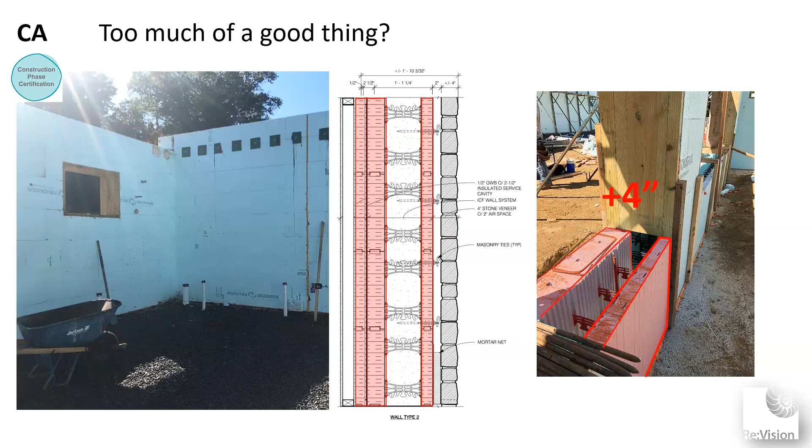If they'd just given me a submittal, I could have saved them at least $10,000, maybe more. If they'd just taken half an hour and given me a submittal, I would not have approved it, and they could have bought the right thing. But probably even more critical than this is that having too much insulation could have killed the entire project.

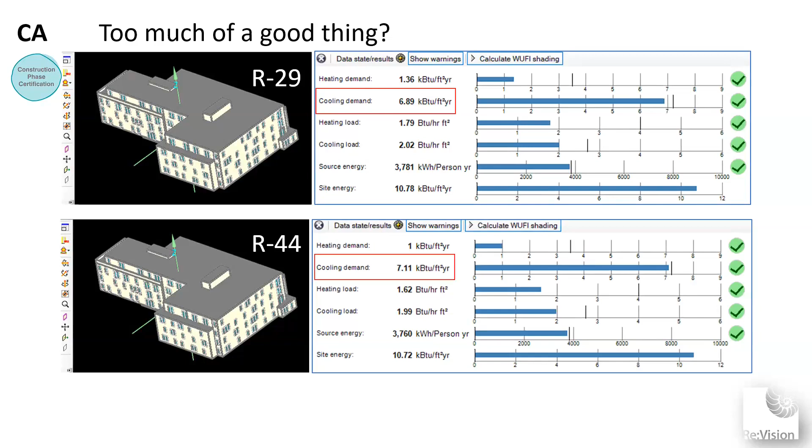On a multifamily building, the limiting factor is often the cooling demand, and you can see the cooling demand increases - here it is with the ICFs as designed, and here it is with the ICFs as built. The cooling demand increases from 6.89 kBTU to 7.11, and our limit was 7.2. So we just squeaked in under the wire. But you can actually have too much insulation - too much of a good thing - on some projects.

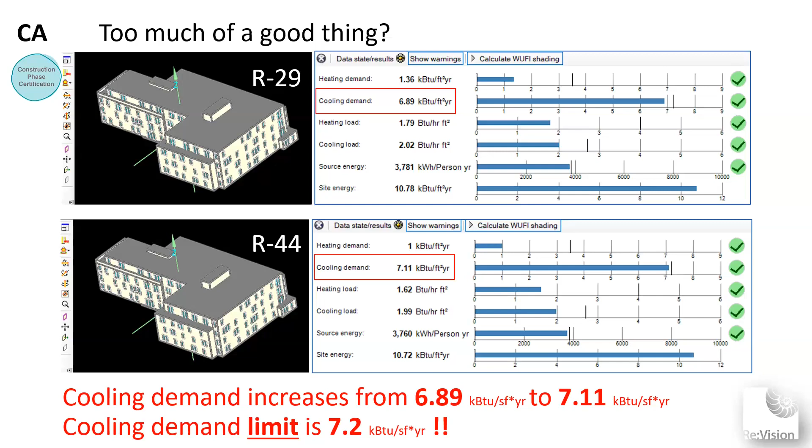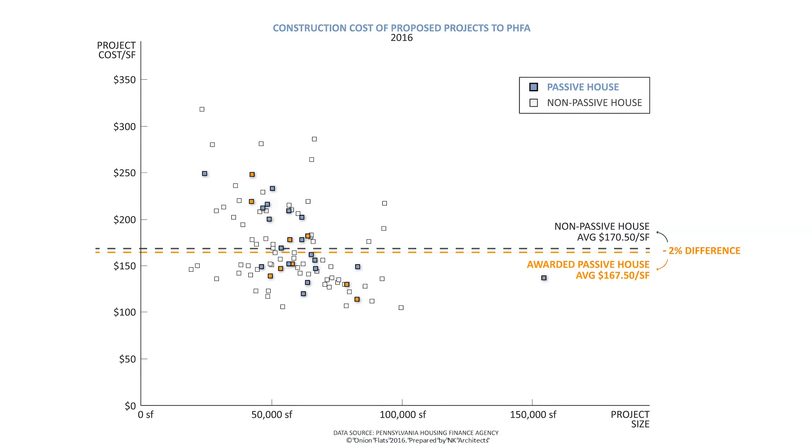And then the next year, and this was a surprise to all of us, the passive house projects were actually less on average than the non-passive house projects. But the same thing applies, right? Some are more expensive, some are less expensive. You can't tell just by looking at price. And that trend held true for the third round of funding as well.

Now, what this tells us is two things. One, do passive houses cost more? Well, if you're using more insulation and equipment like ERVs that you might not use otherwise, yeah, they're going to cost a little bit more. However, there are many, many other cost drivers to projects. So what this data tells us is that passive house is not going to be the major cost driver to these projects, and that you can deliver passive house projects at market rate and comparable to non-passive house projects.

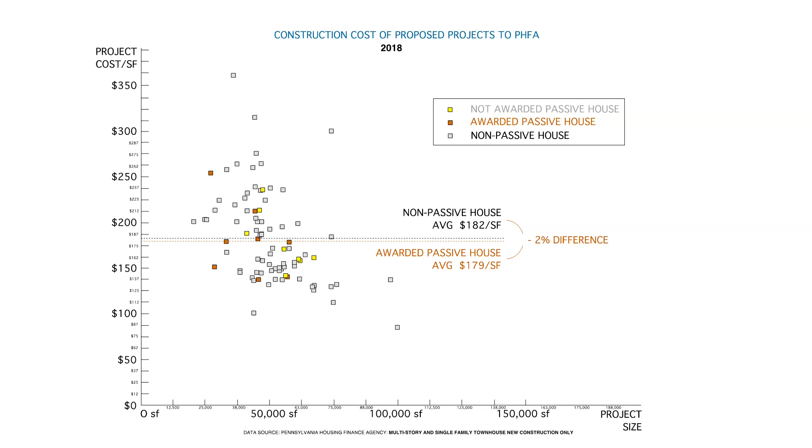So just to sum up, we took a very quick and very broad overview into integrating passive house methodology into the design and construction process. We talked about scoping and scheduling, energy modeling, iterating, third-party QA/QC. We talked about the typical design process and how and why to reconfigure it. We talked about assemblies and system optimization. We talked about detailing, sequencing, and right sizing. And then we got into CA and talked about all the nested certifications, a little bit of detail about the verification process.

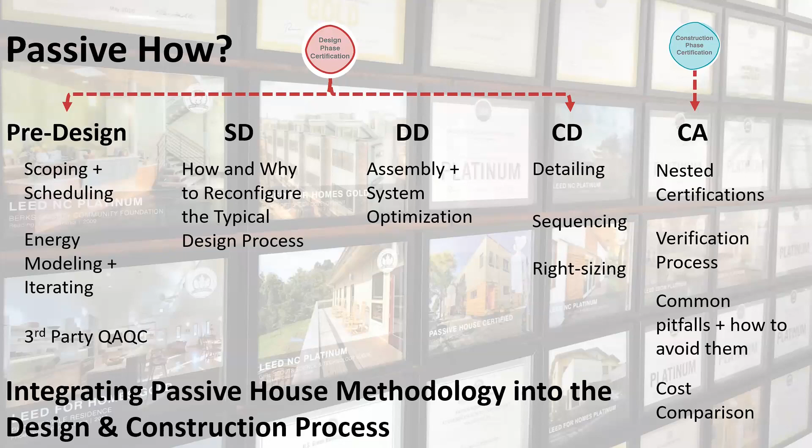I think really critically, common pitfalls and how to avoid them - got a ton more, I actually do an entire presentation just on them. All of these things are actually almost their own presentations. And then we wrapped up with a cost comparison. So I hope that this information was useful to you, and I'd love to answer some questions. So thank you.